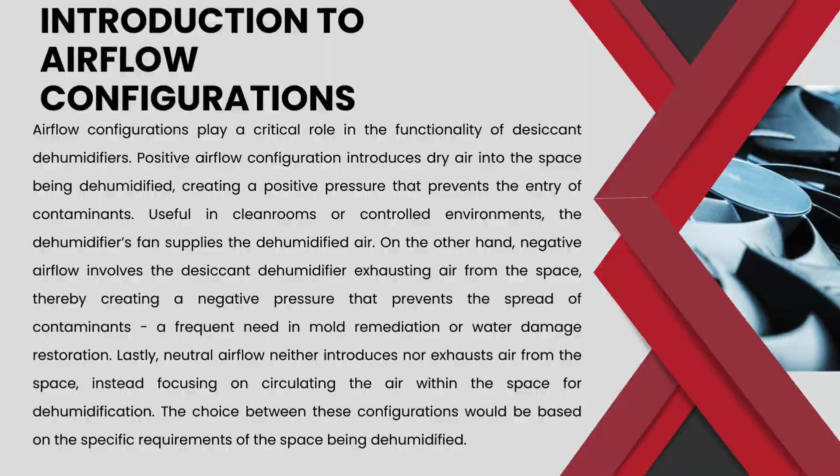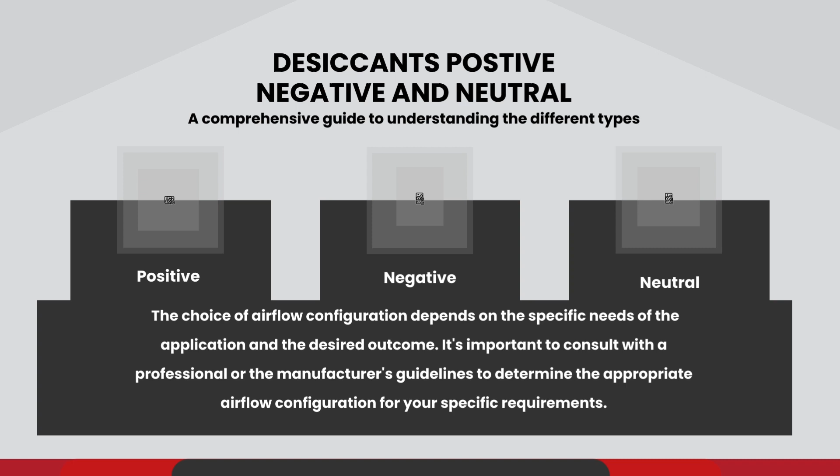So, three different airflows with desiccants that you can play with your airflow on a building in order to achieve your best results for drying and or containment and or the overall air quality of the building. Sometimes one type of airflow may dry slower, but it may be the best result for the building for different reasons. Sometimes it may be faster. So it just depends on your individual circumstance as to which type that you'll choose. And we're going to talk about which types are and when to choose those types and some of the advantages and disadvantages of each.

The airflow is produced by the blowers on the machine, and they've got dampers in them. Depends on which damper you're using. Depends on how you have your hose configuration set up, and several different things can give you your airflow, whether it be negative or positive. Excuse me for skipping back and forth there for a moment. But positive airflow, we'll talk about that a little bit.

Positive airflow means you're actually going to put positive pressure into the building. You're going to put extra air into a building, and that air, once you put it into a building, unless your building has a balloon atmosphere, that air is going to escape somewhere out that building. It is not possible to put more air pressure in a building and expect it to stay in the building. That would not be a positive airflow. So let's talk about why we do positive airflows. There's two or three different reasons.

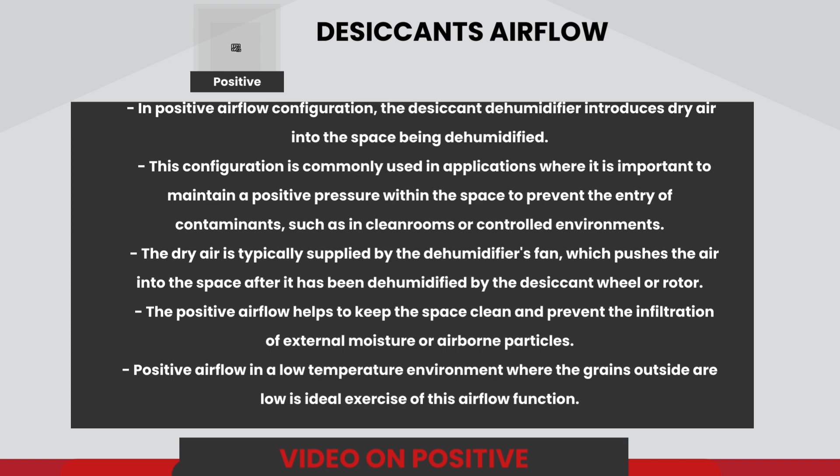One reason would be, let's say that it is really cold outside and the grains of moisture are really low. Then you might use a positive airflow. Let's say that there's a lot of workers coming in at the building, and regardless of how much you try to keep that environment tight, the door is going to be open a lot. You might use a positive airflow. So, a lot of different reasons to use positive.

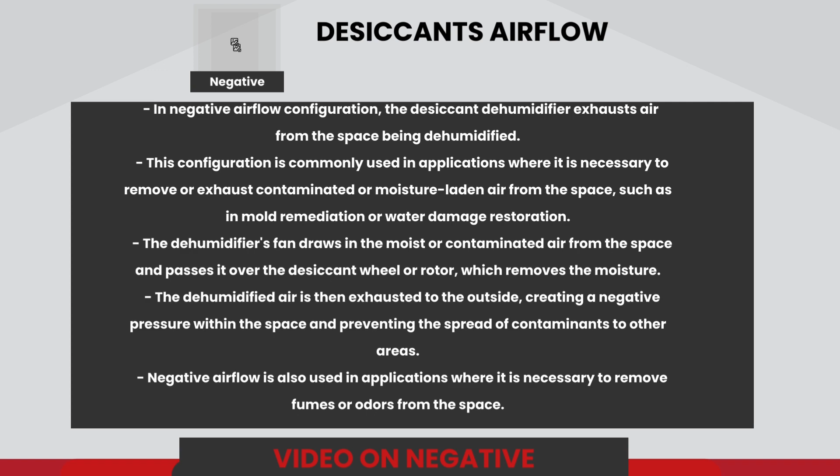Negative airflow is basically pulling air out of the building. And again, unless you have a balloon type atmosphere, that air that you pull out of the building is going to be replaced by air that comes back in to the building. Now, you can put that air back into the building by an artificial means, such as a negative or positive air machine. Makeup air is what's commonly referred to, or it will just seep in from the way buildings leak. So you have to be real careful when you're doing negative air pressure as far as maintaining a good drying environment.

The next pressure is a neutral pressure, and this would be similar to what you would have when you're using a conventional LGR. You're not putting more air into the building than you're taking out. So let's just say, for example, you're putting 5,000 CFM of dry air in the building. Your return is pulling 5,000 CFM of moist air back out of the building. So you would not be increasing the pressure or decreasing the pressure.

When you get scientifically down to it, you have a meter called a manometer, and you can use a manometer to record these pressures. They have recording manometers where you get an actual tape readout. You've got electronic manometers where it sends you the readings so you can tell what's going on from your cell phone when you're looking at the readings on there.

So if you need the type of service such as asbestos or mold or something that would require you to record and document and/or to be extra careful about when you have negative or positive airflows, then you would need to consider using a manometer to monitor the situation to make sure you stay there.

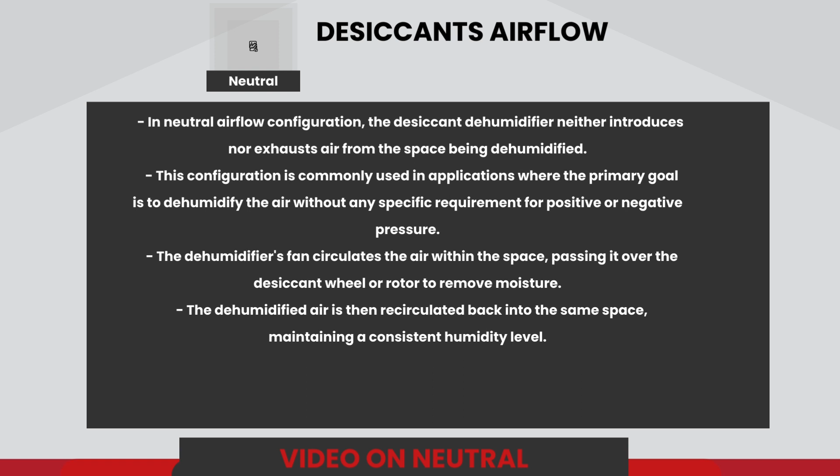If you're on a drying project, and that's pretty much it, it's not going to affect the drying that much if something shuts down or something and your positive and negative airflow change for a short period of time.

Positive, negative, neutral. Positive, again, cold climates when grains are low outside. If you've got grains that are extremely low outside, why not use that outside air that God has created for us and put it into the building? Well, the only reason you normally cannot do that is because it's too cold. And normally, cold air does have a low grain atmosphere to it, and the air is excellent for drying a building. But it's like using your hair dryer on a cold setting.

It would take an extreme amount of time, even though the air is dry, to get a building dry if it's cold. So you have to keep the building warm. But if you can use that low grain air from the outside, you're a lot better off. So if you have a cold climate, you can take that air from the outside, run it through your desiccant dehumidifier, which will dry it even drier, and then it will warm that up and put warm, extremely dry air into the building.

And you may change that during the course of the job. Let's say you get to a building and it's really wet and you've got 70 grains of moisture in the air in the building, and you only have 20 grains of moisture in the air outside. You start positive pressure. Well, you go about 2 days and now the building's getting dry, and that reverses so that your air inside the building is now drier than the outside. Then you would want to swap from positive over to a negative or neutral.

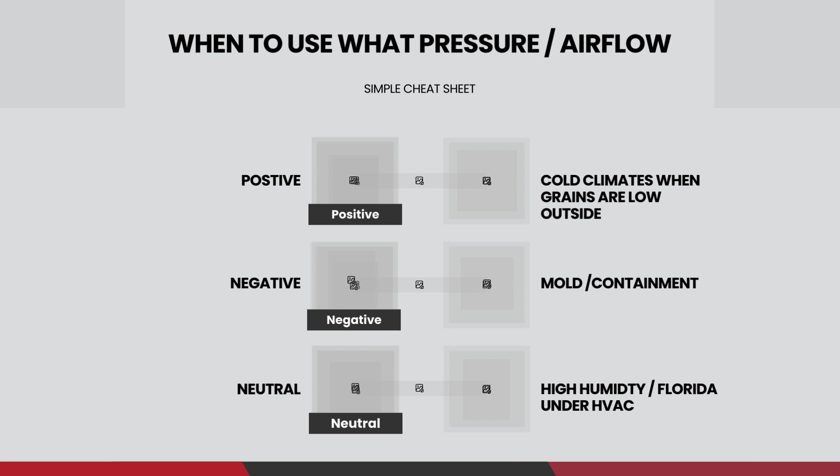Desiccants can be used for more than drying buildings. They also can be used for moisture control. Let's say you're in Florida and there's a building that did not really get wet, but the air conditioners during a hurricane or tornado, or maybe even just for a maintenance problem, are down. They got pulled off the roof. They got tore up. They're taking them out for maintenance, and something went wrong. They're not going to be able to replace them for a while.

Well, if you've got a very high humidity level outside and you don't have any moisture controls, i.e., climate controlled storage is why they have climate controlled storage areas, then your stuff in that building is going to absorb moisture. The ceiling tile will absorb moisture and sag after a few days. Your furniture is in the building. The upholstery will absorb moisture and start to have microbial growth on them. Sheetrock absorbs moisture. Pretty much everything in the building will absorb moisture.

With temperature variations, you may even have dew inside the building without any moisture control. So sometimes you use a desiccant for moisture control just in areas where your moisture control systems that have been engineered into the building have been damaged. It affects your indoor air quality. If it's hot in the building and the air is real humid, it's a lot harder to breathe than it is if you're in a hot environment and it's really dry.

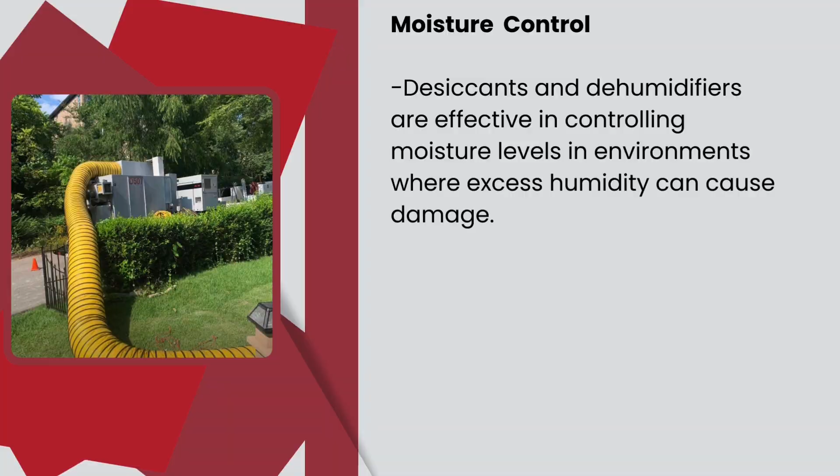We have containment set up here. Obviously, they've got either renovation or something going on in the building, and desiccants are great at controlling those moisture levels in large buildings. They control it in small ones too, but it's overkill in most places. But you can control the moisture in those large buildings and help maintain that comfortable environment that they will need for the people visiting the building.

You also have to maintain a relatively comfortable environment for the workers in the building. There are new OSHA regulations out that I don't see too many people following at all, but your OSHA regulations for working conditions for your employees, particularly when they're in PPE, are astronomical. Nobody's going by them, and we're leaving a lot of money on the table, because if you go by the OSHA regulations, which you could, and if and when you get caught without going through them, and all it takes is one employee complaint, you'll wish you had.

But you have to maintain a relatively comfortable environment for your employees. If you don't, you have to give them an extreme amount of additional breaks to cool off and to get water. And it can be as much as taking a break every 10 minutes. Work 10, rest 10, work 10, rest 10. It's 50% of your day, any way you cut it. So your options there are keeping the environment not clean, but comfortable within the OSHA regulations so your employees can continue to work.

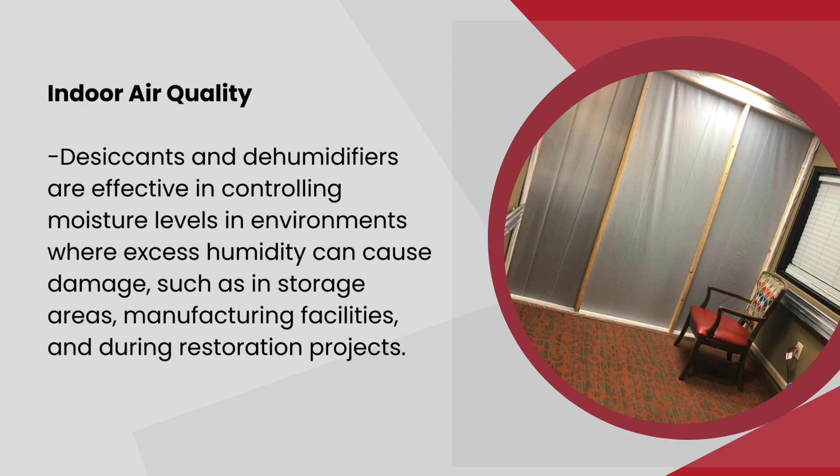You can use desiccants on residential, commercial, and industrial, depending on what size desiccants you have and what their heating source is. They make small desiccants for residential that go maybe 1,000 CFM. That is an excellent desiccant to do a home and dry it a lot faster, a lot more efficient than refrigerant dehumidification of any type, because the air is so much drier. It will pull a lot of electricity, but a lot of times you can still plug it into house power. You also don't have to worry about temperature as much.

As you all know or should know if you're listening to this, if you get your temperature raised up in a house pretty high because the air conditioner system's down, your refrigerant dehumidifier will not work. It won't let the coils get cold enough to accumulate the moisture, to freeze the moisture, and then evacuate it out of the building. So if you're running a refrigerant in a house that's 100 degrees, you're wasting time and money. So a desiccant would take the place of that and help that out.

Desiccant equally works well in cold environments. However, you're still going to have an evaporation issue in a cold environment. No matter what kind of dehumidifier you use, you're going to have trouble getting evaporation going like you need to.

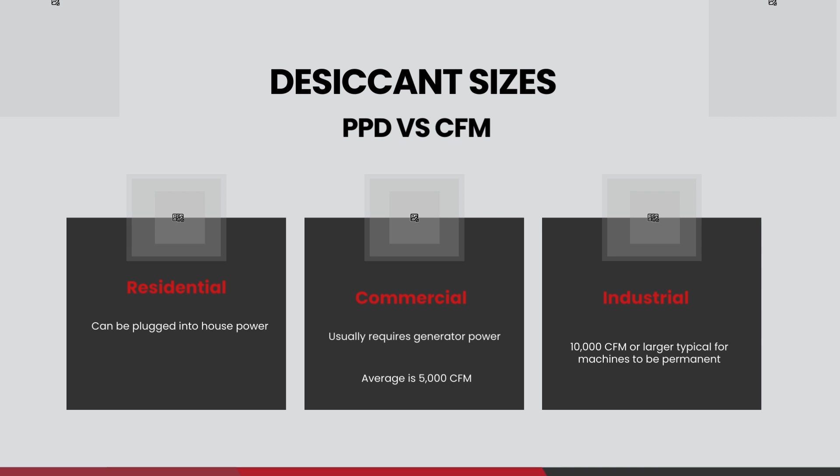However, once again, let an industrial or commercial electrician figure that out. They may already have the grid and the bus bars in that building running at near capacity before you got there. They may not have an additional 150 amps of 480 volt electricity to give to you to pull away from that. So you may overload the entire building. So you've got to have somebody that knows what they're doing to hook those up and to be sure you're doing it in a safe manner.

LGRs normally work better when you're dealing with houses 2,500 square feet and below. You can do bigger houses with more, but typically when you get too much bigger, you start looking at the efficiency of using a desiccant. Desiccants, you can get them in sizes down, I think, to 450 CFM all the way up to 25,000 CFM for larger buildings. So when you put your drying plan together, you just have to decide which is better for your drying plan.

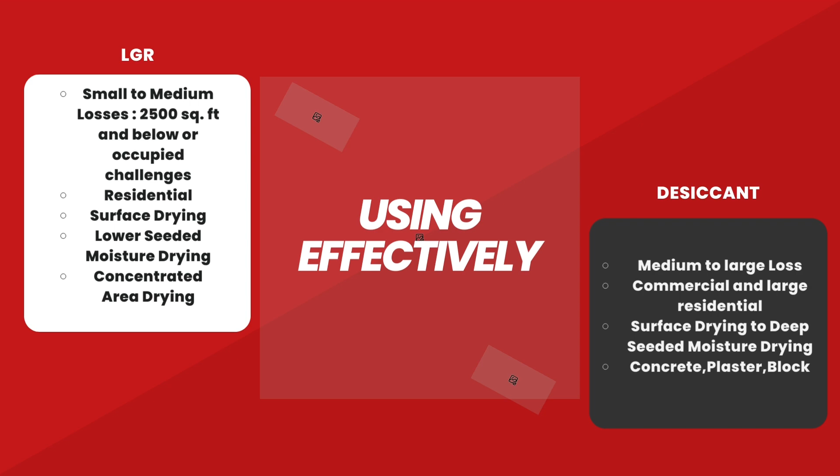We're not teaching water restoration today, but if you don't have a plan before you start drying the building, you have violated the IICRC standards of how to dry a building. The standard says you must have a written drying plan before you start to dry a building, so just keep that in mind.

Pros and cons: LGRs don't work in high temperatures. Sometimes drains are hard to find. Get an office building, they may have a central bathroom down the hallway to the left, and you're working on the other end, but there's no drains to drain your water out of the dehumidifiers. You may have trouble doing that. I've seen people throw a hose over into a 5 gallon bucket, and if your moisture level is even low, but definitely medium to high, and your dehumidifier is working good, it'll overflow that overnight, and now you've got water all on the floor. Never a good deal.

So a lot of people use 30 to 50 gallon barrels or drums. Those work, but they're heavy, and you got to figure out a way to pump those out and to get them to the drain area too. So a lot of times when you've got issues in a building where you do not have a lot of places to run your drain hoses, then that's a con, if you will, for the LGR. LGRs are also difficult if you're doing the 15th floor of a building with no elevator. You've got to carry them up 15 flights of steps. It makes it a little bit more difficult.

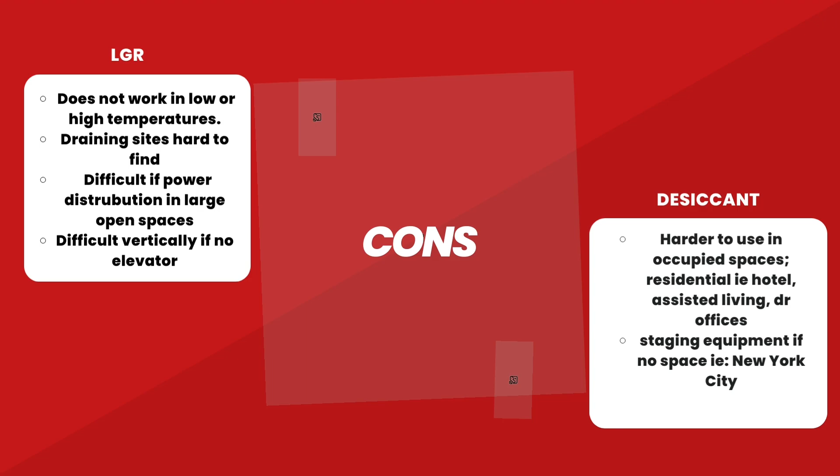We talked about the three types of desiccants vaguely, but let's go over them a little more into detail. All desiccants have an amount of electricity to run the blowers that either blow air or suck air, either way you look at it, and to run the gauges and the thermostats and the safety controls. So all of them are going to run off some amount of electricity.

When we refer to an electric desiccant, we refer to one that's all electric. You put the electricity to it and it works. They are the simplest desiccant to operate. There's a lot less that goes wrong, a lot less adjustments on them, but they use an extreme amount of electricity.

If you run it on a generator, you can burn about 8 gallons of fuel an hour to run an all electric desiccant. If you run it on the building, you're going to run about 150 amps at 480 volt if the building has 480 volt available. So electric is good because it's simple, but it has its own set of difficulties with it.

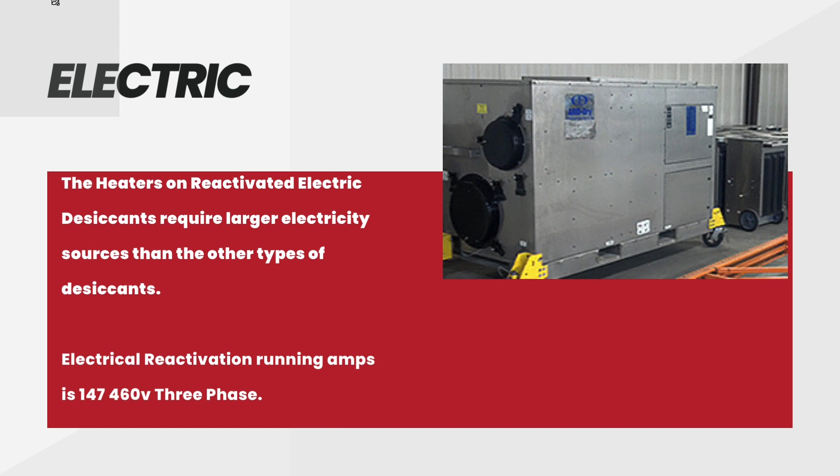The third type of desiccant is a diesel fired desiccant. That is when you have electric motors on the desiccant. Most of them will run on 220 volt, 50 amps of electricity, which is the same as a stove plug in a house, so relatively low electricity. And then your heaters are fired by a diesel fueled heater. So you have a diesel tank, you fill it up with diesel, and the diesel fires that.

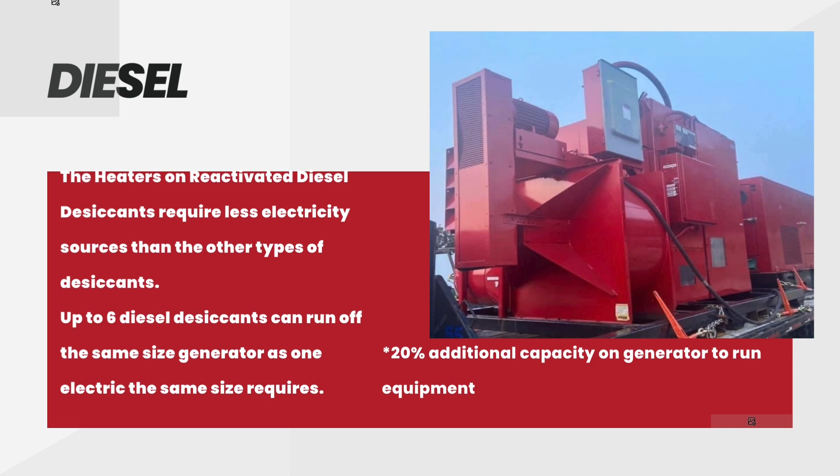So today we went over a lot about desiccants. It's a lot of information to shove into a 30 to 40 minute speech. A lot of times you just have to sit back and look at the situation, scratch your head, and see what works best for you on the particular job. There is no one piece of equipment that's the cat's meow that'll do it all. So you just have to try to engineer that and figure that out.